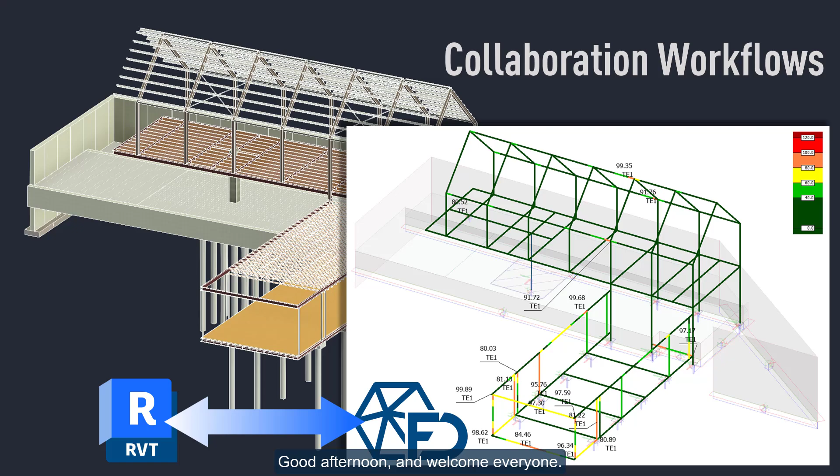In today's webinar, I will guide you through the main connection possibilities between Revit and FEM-Design. The focus is on practical workflows, how data moves between Revit and FEM-Design, what we can transfer, and which workflow to use in different situations.

There are two main ways to connect Revit and FEM-Design. One is the IFC workflow, where we exchange the physical model through IFC. The other is the direct add-in workflow. It uses the StruSoft Revit add-in and exchanges data through StruXML, our own data exchange format.

Both workflows can go in either direction, from Revit to FEM-Design and back again. But they are not used for the same purpose. The key question is, which connection should be used and when? Let's start with a short overview.

IFC is an internationally developed and ISO standardized open data format. It is the most widely used BIM exchange format, and it is supported by hundreds of applications worldwide. Several IFC versions are available, and both Revit and FEM-Design support them. But for Revit-based workflows, IFC 2x3 coordination view is still often the safest and most predictable starting point. That is why I usually recommend starting with IFC 2x3.

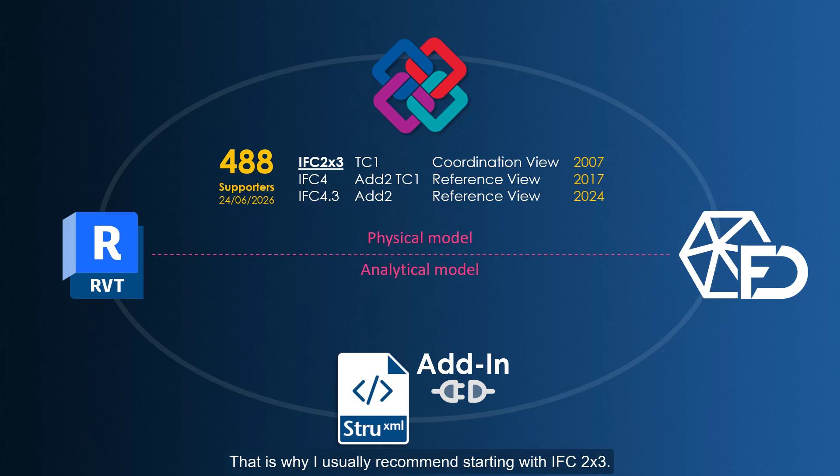The second workflow is the add-in-based connection. It's existed for many years, but after Revit 2023, it had to be redesigned because Autodesk changed the analytical model concept in Revit. Today, I will focus on the current second-generation add-in workflow.

Its latest release can be downloaded free of charge from the FEM-Design wiki. It supports Revit 2026 and 27, and it was published yesterday, so it is very fresh, almost hot. After installation, it appears directly inside the Revit user interface.

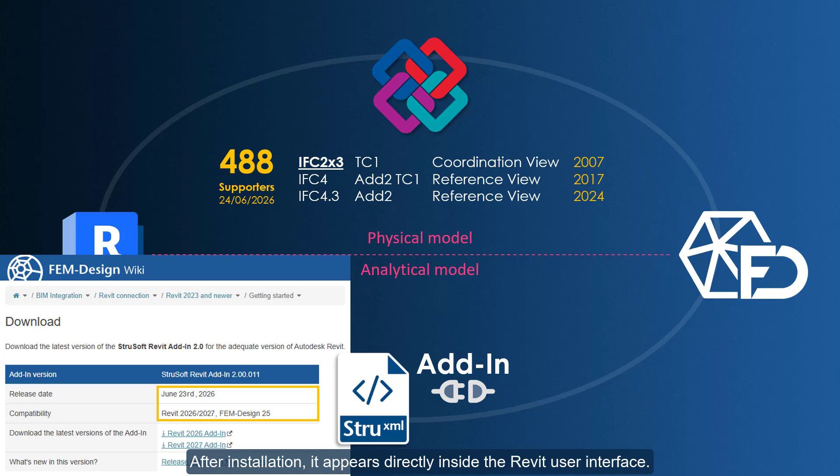So what is the main task? In structural design, we need an analytical model suitable for calculation. In the IFC workflow, the physical model comes from Revit into FEM-Design. During import, FEM-Design creates the analytical model from the physical geometry. The engineer then checks, corrects, and completes it.

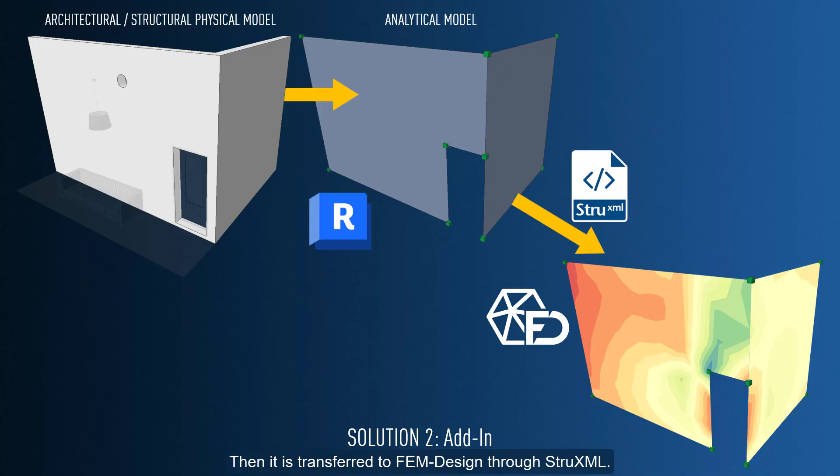In the add-in workflow, the analytical model is already created in Revit. It can include analytical members, panels, basic supports, and simple loads. Then it is transferred to FEM-Design through StruXML. So in simple terms, IFC starts mainly from a physical model. The add-in starts mainly from an analytical model.

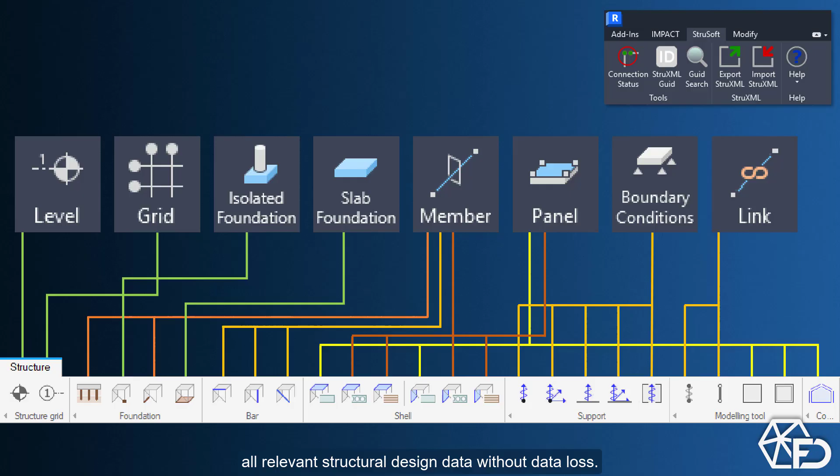Let's now look first at the direct Revit connection using the add-in. We start with a physical model in Revit. This can be an architecture model or a structural model. From this physical model, we can generate an analytical model directly inside the Revit project. After that, the StruSoft add-in can export this analytical model to FEM-Design. The goal of the add-in workflow is to transfer all relevant structural design data without data loss.

It is important to understand that in Revit, not every physical structural object has a native analytical counterpart. Isolated and slab foundations are good examples. They don't have an analytical representation in Revit, while FEM-Design has object types for them. Since these are still important structural objects, the add-in can transfer them to FEM-Design as part of the exchange workflow.

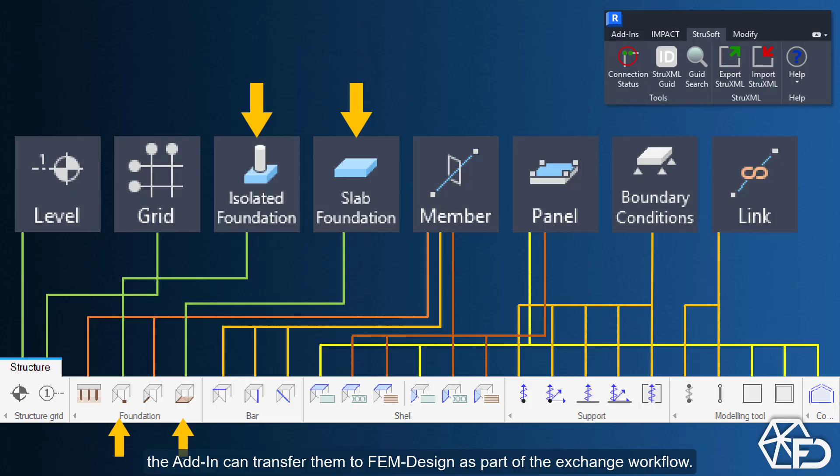The same is true for levels and grids. They are not analytical elements, but they are useful reference objects for positioning, orientation, view definition, and identification. Therefore, the add-in transfers them as well.

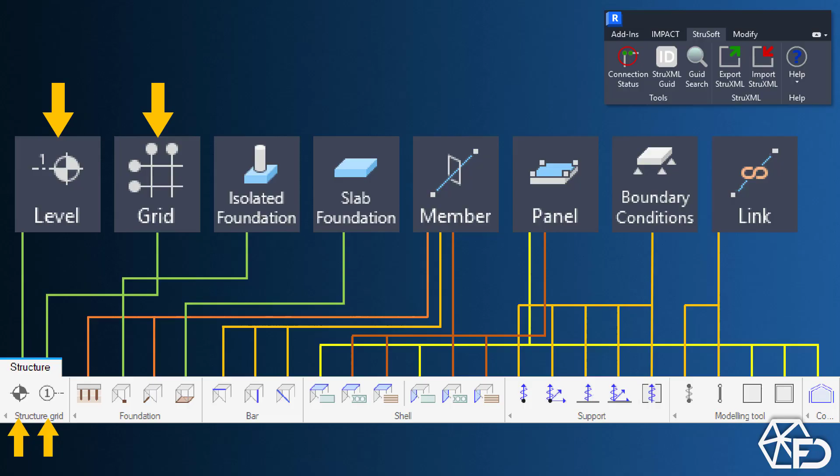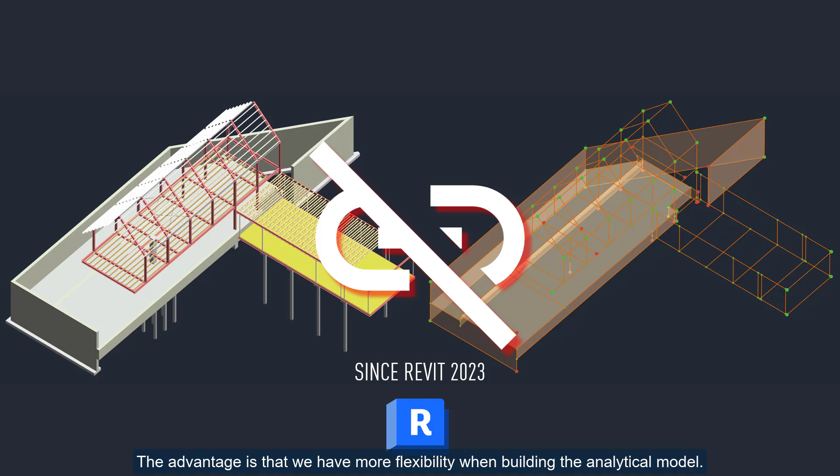In the current Revit concept, analytical objects are independent from physical objects. They are not automatically linked to them, and they don't follow every change in the physical model. The advantage is that we have more flexibility when building the analytical model. In fact, analytical objects can even exist without physical counterparts. This was an important change in Revit 2023. Before that, analytical counterparts were always directly linked to the physical structural objects.

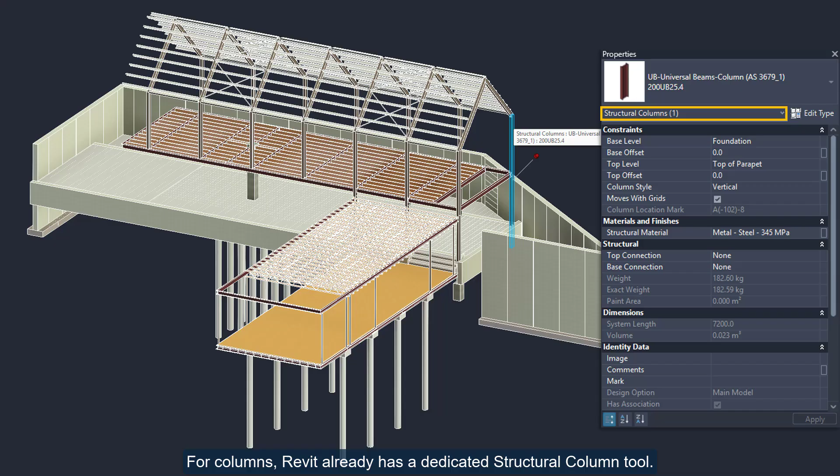So, if we want to create analytical objects from physical load-bearing elements, we first have to prepare the Revit model properly. For walls, the structural parameter has to be activated. The same applies to floors. For columns, Revit already has a dedicated structural column tool, so you don't need to set anything else. For beams and bars, the structural framing tool is used.

Structural foundations are a special case. They don't have native Revit analytical counterparts, but if we want, they can still be exported to FEM-Design by the add-in. After this preparation, we can use Revit's analytical automation tools to generate the analytical model. This can be fully automatic, but it can also be controlled by settings.

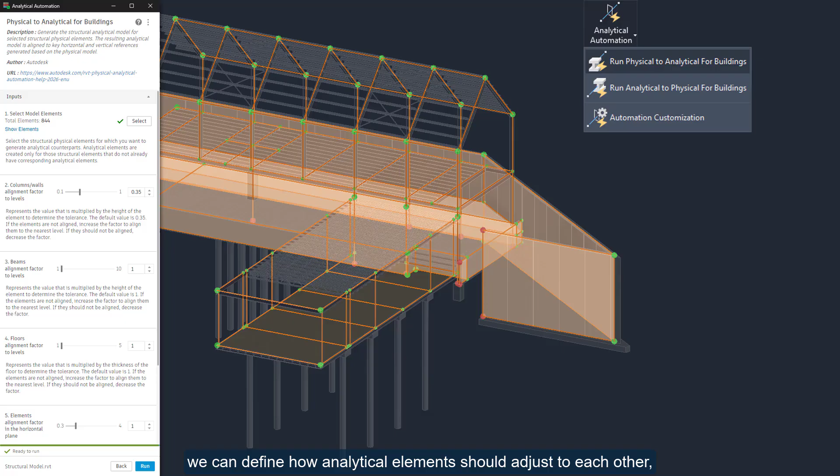With automation customization, we can define how analytical elements should adjust to each other, in what order, with what priority, and within what tolerance. Revit also allows manual analytical modeling. We can create analytical members and panels directly from the Analyze tab. When analytical elements are generated from physical objects, they usually inherit material and section information. But manually created analytical elements may not have all required data.

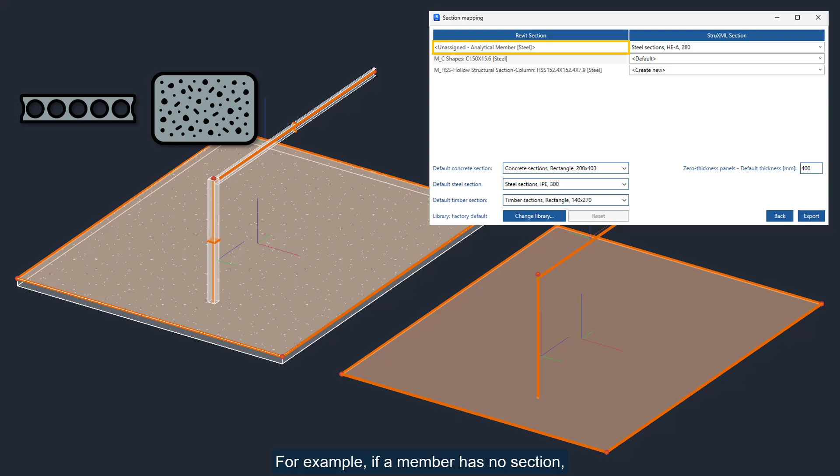This is not a problem because during export, we can assign missing materials, sections, or panel thicknesses. For example, if a member has no section, we can define a default starting section by material type. If a panel has zero thickness, we can define a substitute thickness for FEM-Design.

Inside Revit, we can also define boundary conditions and analytical links. Boundary conditions correspond to supports in FEM-Design. Links correspond to FEM-Design's point-to-point connections. Revit can also define simple loads, point loads, line loads, and area loads, organized into load cases.

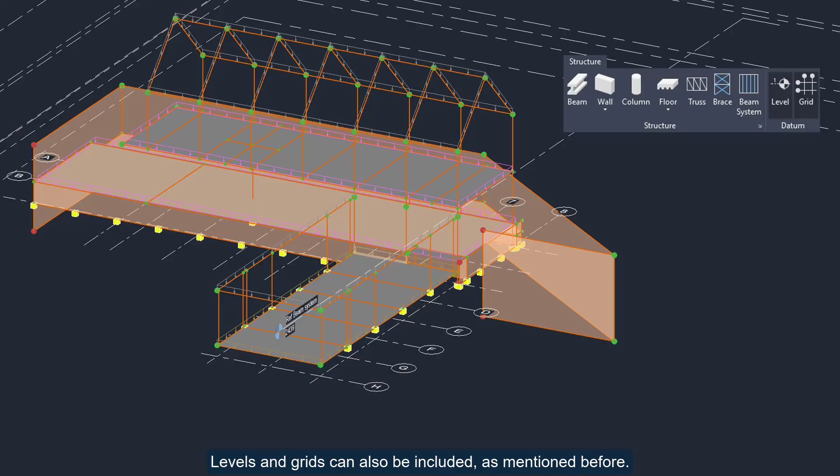Levels and grids can also be included, as mentioned before. Levels may represent building stories, but they can also be general horizontal reference planes. Grids are useful for orientation and later model checking.

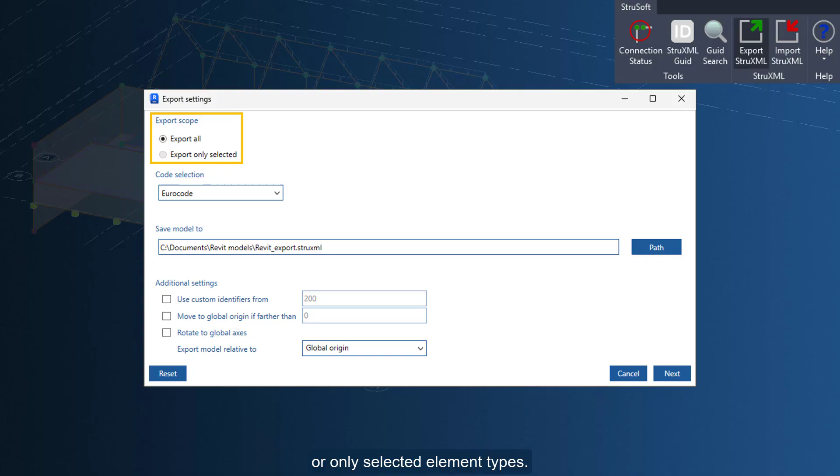To export the model, we start the StruSoft add-in command, Export StruXML. The export is guided by a sequence of dialogues. First, we define which objects should be exported. We can export all relevant objects in the project or only a current selection. This is useful if we want to export only one story, one part of the model, or only selected element types. Later, several StruXML files can be imported or merged into one FEM-Design project.

We then select the design code. This is important because the material and section databases used in the next steps depend on the selected standard. Then we arrive at position settings. In many BIM projects, especially large public or infrastructure-related projects, the model is placed in real-world coordinates. This is important for coordination and model federation.

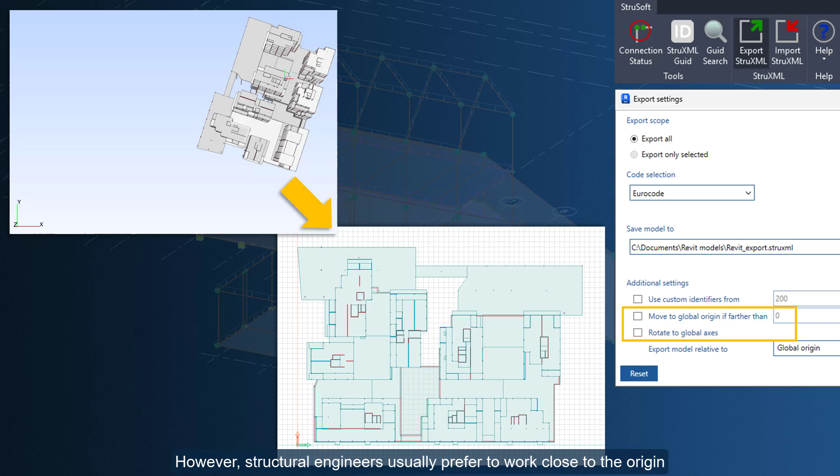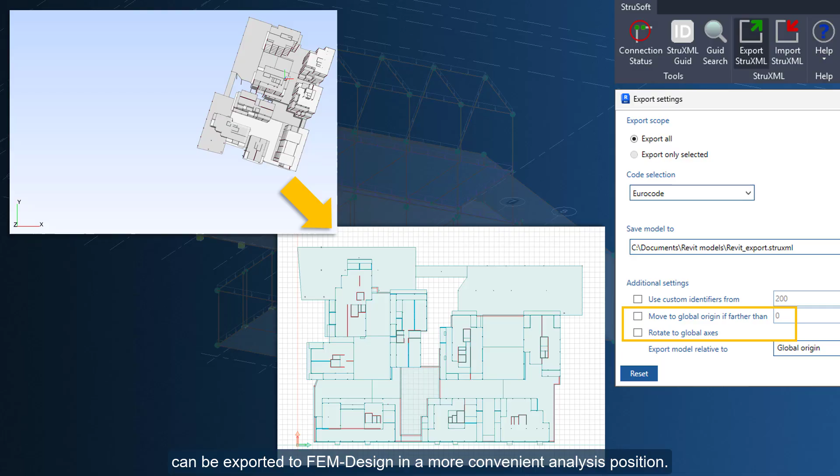However, structural engineers usually prefer to work close to the origin and aligned with the global axis of the analysis software. Therefore, the add-in can move and rotate the model automatically during export. This means that the model located far from the Revit origin can be exported to FEM-Design in a more convenient analysis position. This is also important for bidirectional communication.

If the model later comes back from FEM-Design to Revit, it has to return to its original Revit position. The add-in can handle this automatically because the transformation values are stored in the Revit project itself. Revit also has different reference systems: global origin, project base point, and survey point. During export, we can choose which reference system should be used.

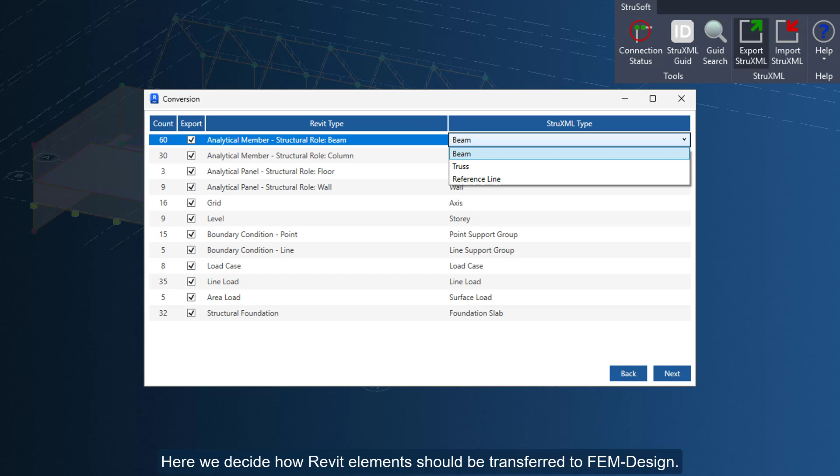The next step is type mapping. Here we decide how Revit elements should be transferred to FEM-Design. For example, an analytical member with a beam role can become a FEM-Design beam, a truss, or only a 3D reference line. In the list, we can see analytical members and panels, but also grids, levels, boundary conditions, structural foundations, and loads.

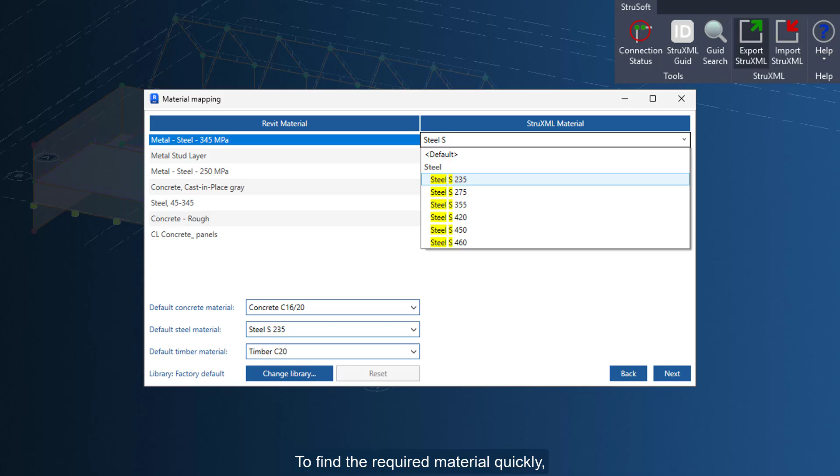After type mapping, we map Revit materials to FEM-Design materials. We can use automatic default mapping based on material types, or we can manually select the exact FEM-Design material from the database. To find the required material quickly, we can simply type part of its name in the search field.

Then we map the cross-sections of analytical members. A useful feature is that the add-in can create new FEM-Design sections from Revit data. With the Create New option, the section geometry is saved into the StruXML file. During import, FEM-Design assigns the new section to the corresponding analytical members. Material and section mapping can also be based on custom StruXML libraries, not only on the standard built-in FEM-Design databases.

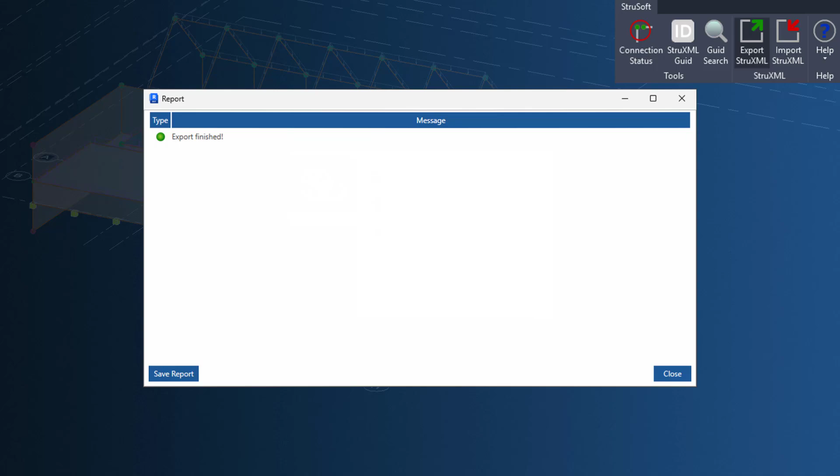At the end of the export, we receive a report. This summarizes the result and lists possible warnings, for example, missing material or section mappings. Now we can open the exported StruXML file in FEM-Design. Usually, we open it in the 3D Structure module, but it can also be opened in the Plate module, for example, if we transfer only one floor system with its supporting elements.

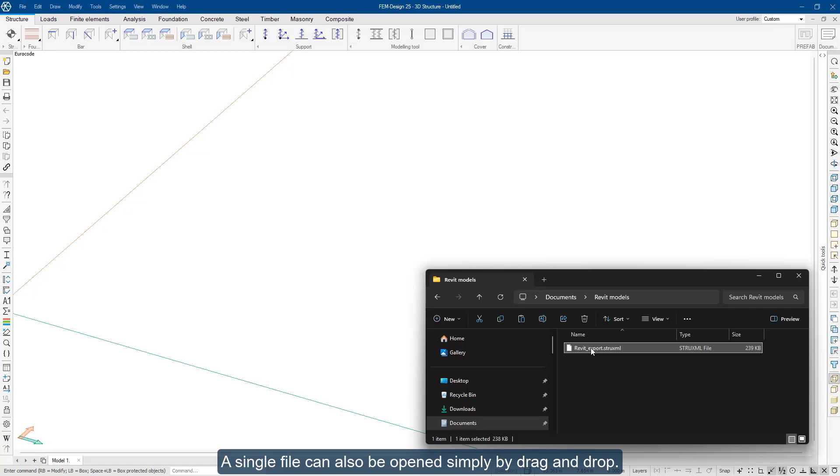The file can be opened with the Open command or inserted with the Paste command. Paste is useful when we build up one FEM-Design project from several StruXML files. A single file can also be opened simply by drag and drop. The import itself is very fast. After import, the design code follows the standard selected in the add-in export settings.

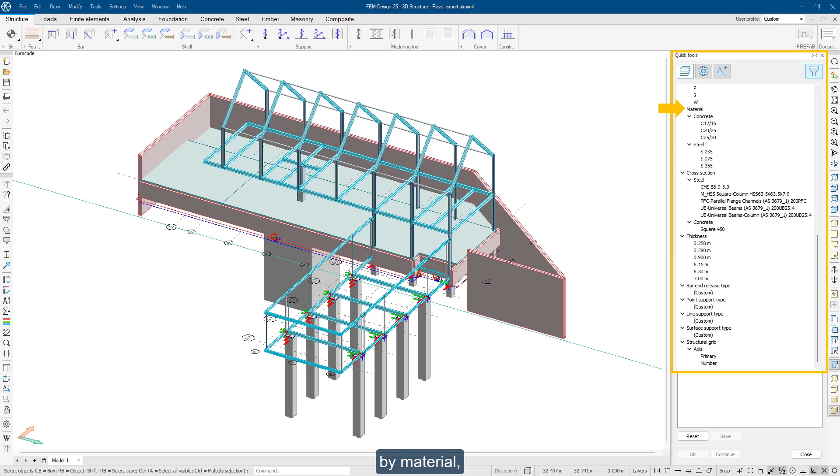We can now see the analytical members and panels together with levels and grids. If we switch on the physical representation, we can also see the assigned thicknesses and cross-sections. The filter panel in FEM-Design helps us navigate the imported model. Elements can be grouped by story, by axis, by type, by support type, by original Revit identifier or name, by material, or by section, including the new sections generated from Revit section data, like this selected example.

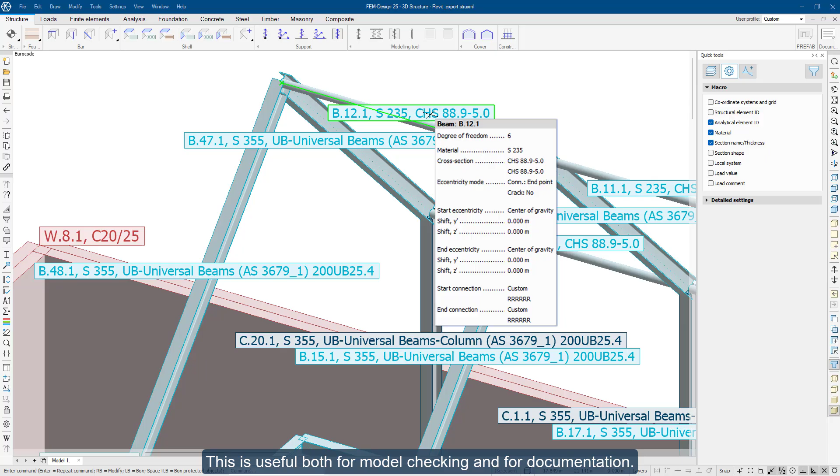Element information can also be displayed as labels in the model space, or checked by hovering over the elements. This is useful both for model checking and for documentation. Supports are imported according to the boundary conditions defined in Revit. Loads are also imported together with the load cases. However, additional loads, design load groups, and combinations have to be completed inside FEM-Design.

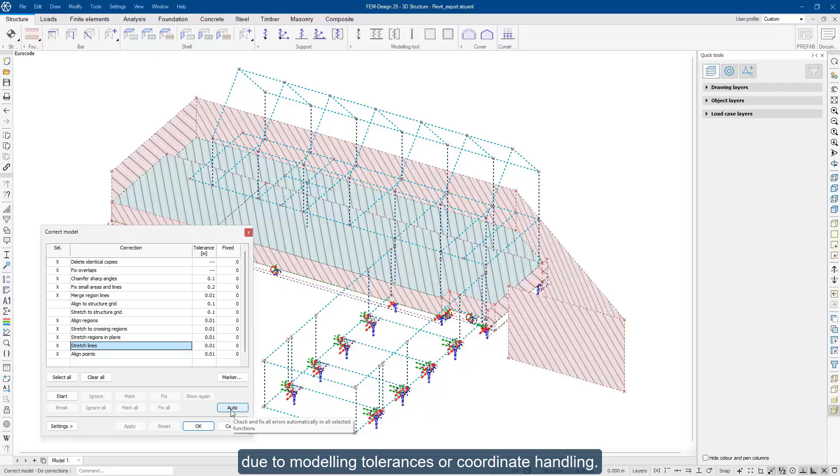After import, even if the model looks correct, we should always check it. First, we should look for small geometry problems and connection issues. These can appear even in well-prepared Revit models due to the modeling tolerances or coordinate handling.

FEM-Design provides the correct model function to find and fix them. It can find short elements, inaccurate line elements, small regions, or other problematic objects, and it can correct them under user control. After correction, it is useful to run the check again. The goal is that the number of problematic objects should go down and finally converge close to zero.

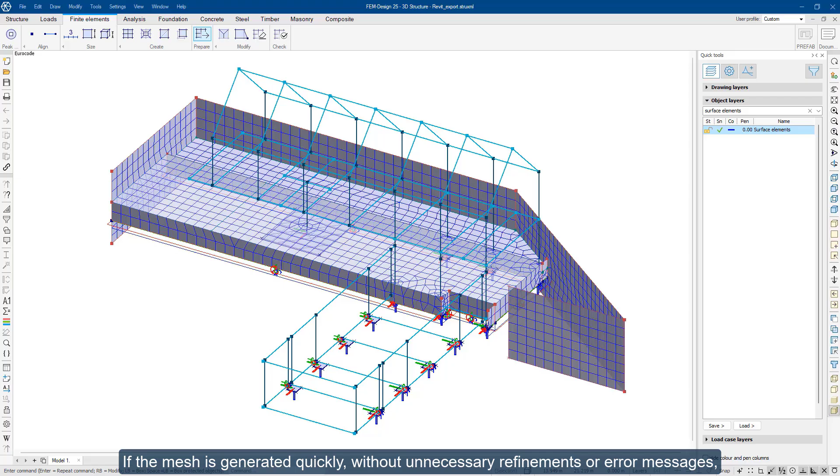Another useful check is finite element mesh generation. If the mesh is generated quickly, without unnecessary refinements or error messages, this means that the geometry is correct. We can also run a simple analysis, for example, with automatic self-weight, and check the displacement shape. This is a very practical quality check. If elements are not connected properly, or if supports are missing, the problem usually becomes visible very quickly.

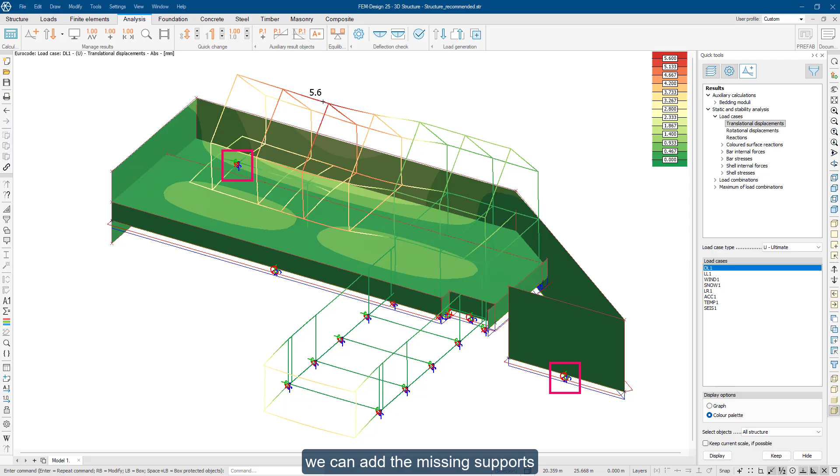In this example, the displacement animation shows that some walls were not supported in Revit, and the left side of the frame is weakly supported. Inside FEM-Design, with the modeling tools, we can add the missing supports or propose a more stable bracing or support system. After that, we can continue with the normal analysis and design workflow. For example, we can design steel members and optimize their cross-sections based on their utilization. After the model has been checked and designed, it can also be sent back to Revit.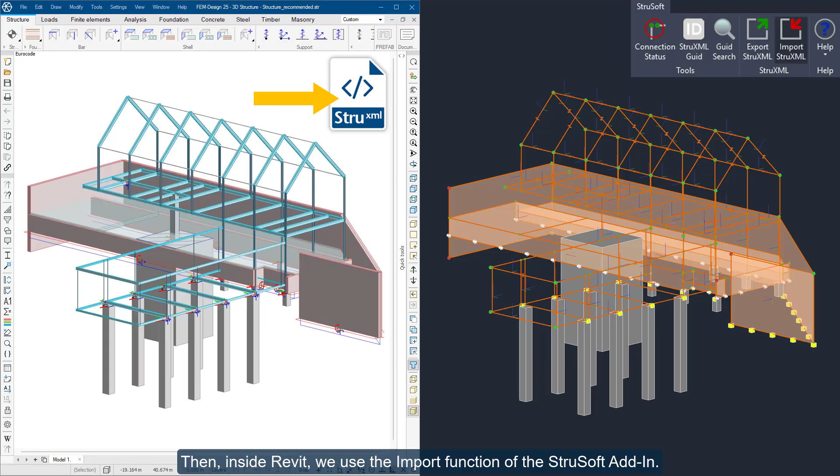Now let's look at the add-in workflow in the other direction, from FEM-Design to Revit. First, we export the FEM-Design model to StruXML. Then, inside Revit, we use the import function of the StruSoft add-in. Again, the purpose is to transfer all relevant information without data loss. The first step is file selection. Here we can also decide whether to import the original FEM-Design data as reference information together with the unique element identifiers. Then we define type mapping and filtering.

We can decide which elements should be imported and which should be skipped. For example, if stories and axes already exist in the host Revit project, we can leave them out. Some FEM-Design objects become physical Revit objects. For example, a slab foundation can become a Revit slab foundation, because Revit doesn't have a corresponding analytical object for it, as mentioned before. Then we do the material and section mapping.

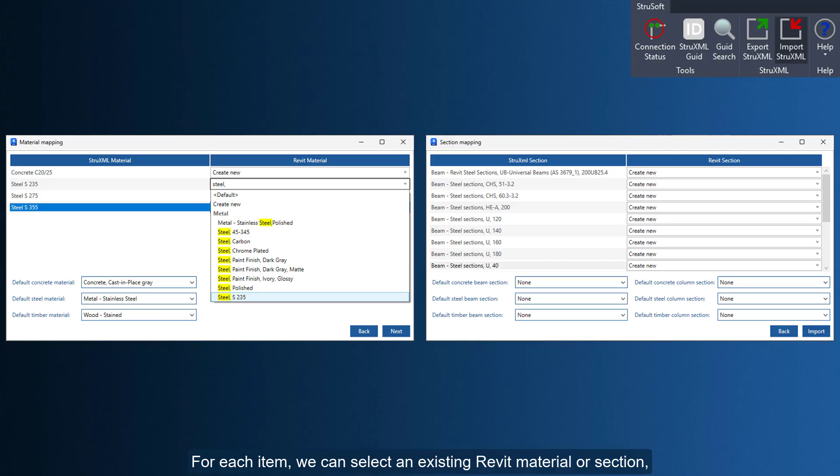For each item, we can select an existing Revit material or section, or choose Create New. This is one of the strongest features of this workflow. The add-in can create new Revit materials and section types from the FEM-Design data stored in the StruXML file. So the final design materials and sections can be used directly inside Revit. There is no need to recreate them manually in the family editor, either before or after import.

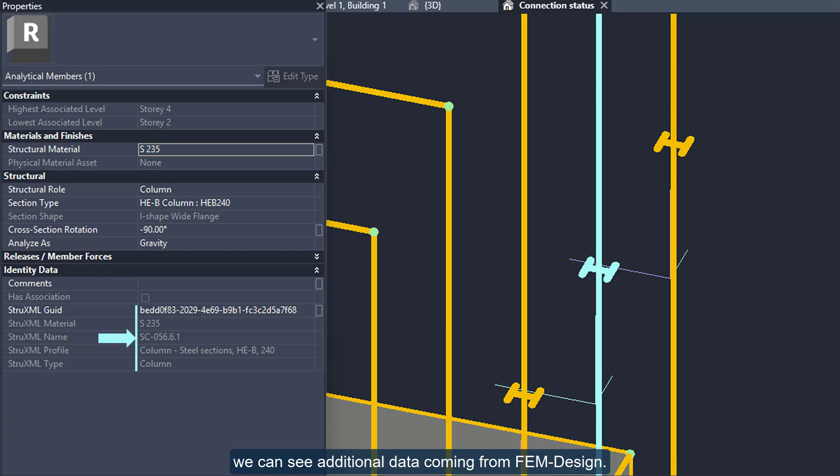At the end, we again receive an import report. Just for demonstration, I show a simple warning here. One column has no section mapping. The element is still imported without a section assignment. If we select an imported element in Revit, we can see additional data coming from FEM-Design. This may include the global unique ID, name, material, profile, and object type.

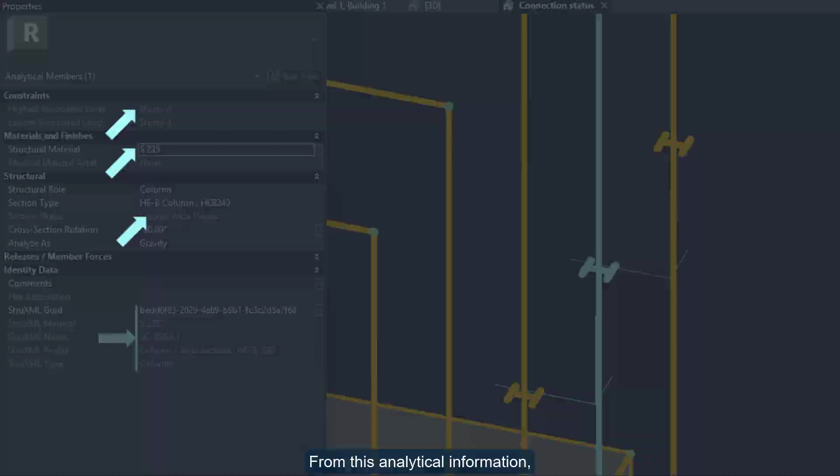At the same time, the analytical member receives the corresponding structural material, role, and section type. From this analytical information, we can create the final physical Revit element using Revit's automatic converter tool. So after import, it is a very simple step. We select the full imported analytical structure and Revit converts it into the required physical elements.

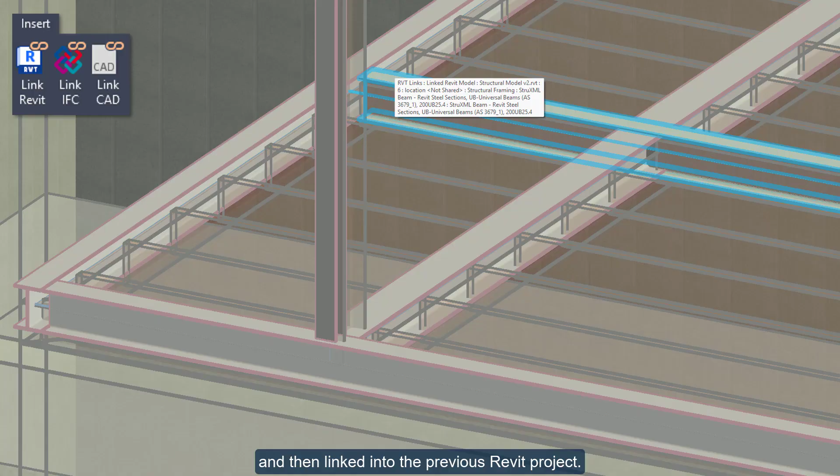Now, a few words about change management. In Revit, there is no dedicated change management tool, but we can use link models for visual comparison. For example, a new StruXML version can be imported into a separate Revit file and then linked into the previous Revit project. With different colors, we can compare the old and new status visually. In Revit, the same reference model idea can also be used with IFC and CAD files.

On the FEM-Design side, we can compare different StruXML files directly with the Compare Files tool. This tool shows new, deleted, and modified elements with color visualization and detailed lists of changes in geometry and properties.

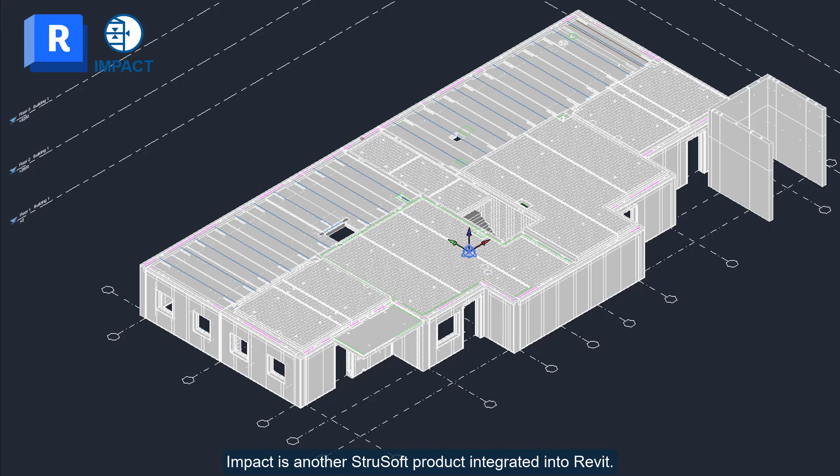Now I would like to show a few additional workflow highlights related to the add-in connection. The first one is Impact Precast. Impact is another StruSoft product integrated into Revit. It supports modeling, detailing, shop drawings, and manufacturing workflows for precast projects. Because Impact works inside Revit, it creates native Revit objects. This means that the analytical counterparts of Impact precast elements can be transferred to FEM-Design through the add-in.

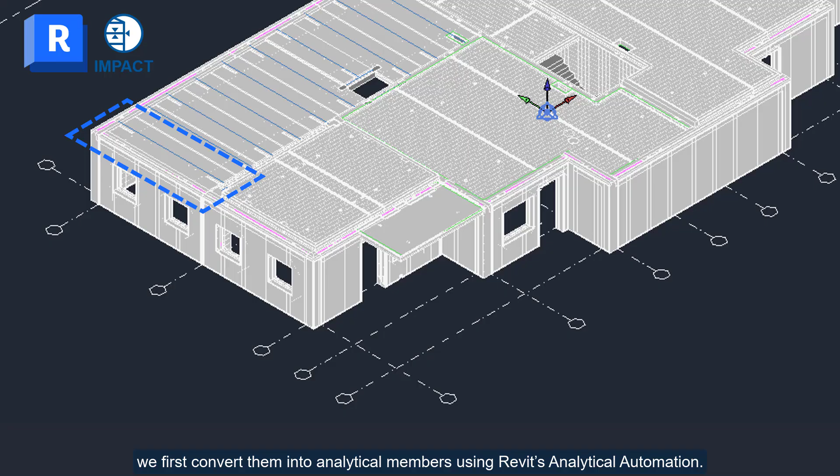There are a few details to keep in mind. Impact creates precast panels in Revit as profile beam or column objects. To transfer them to FEM-Design, we first convert them into analytical members using Revit's analytical automation.

Since the conversion uses the original panel geometry, the part's visibility should be set to show original. Inside FEM-Design, these transferred elements may arrive as profile beams and columns. If we want to analyze them as precast panels, shell objects, we can convert them quickly with the convert function. So thanks to the add-in, we also solved the connection between IMPACT and FEM-Design.

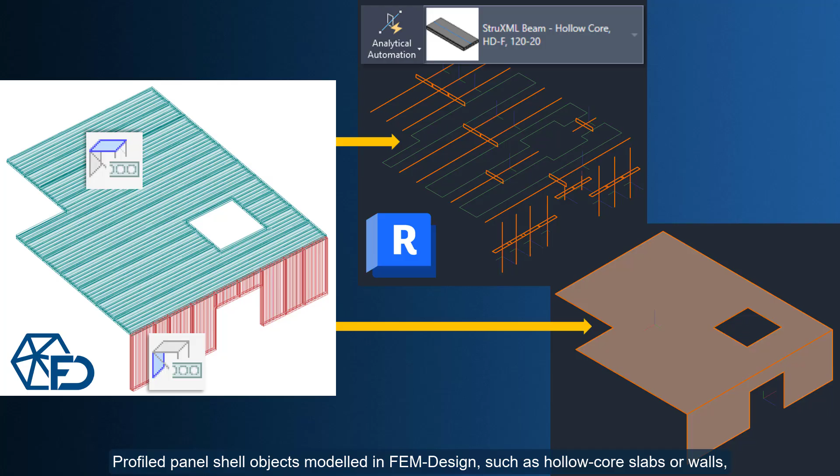The reverse workflow is also supported. Profiled panel shell objects modeled in FEM-Design, such as hollow core slabs or walls, can be imported into Revit as profiled analytical members, reference contour lines, or just simplified physical panel objects.

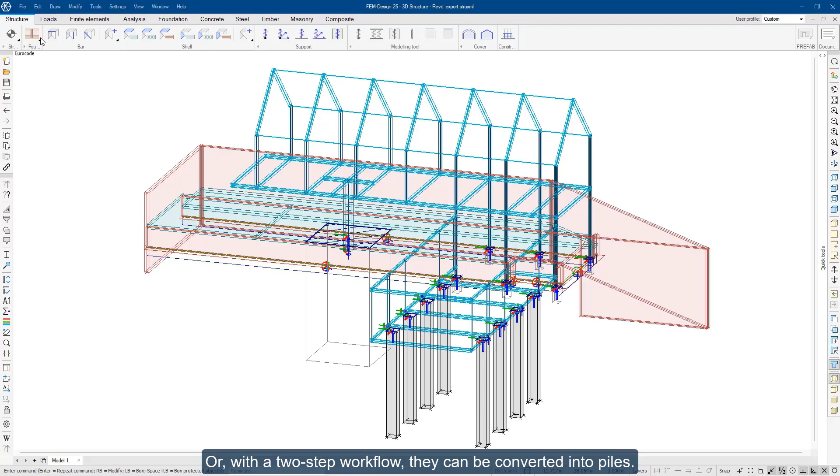Another special case is foundations and piles. If foundation objects arrive in FEM-Design, we can decide whether we want to use them as structural objects or only as references. They can also be converted into drawing solid reference objects, or with a two-step workflow, they can be converted into piles. First, we define a soil object. Then, we use the convert function to create piles with spring data generated automatically from the soil connection.

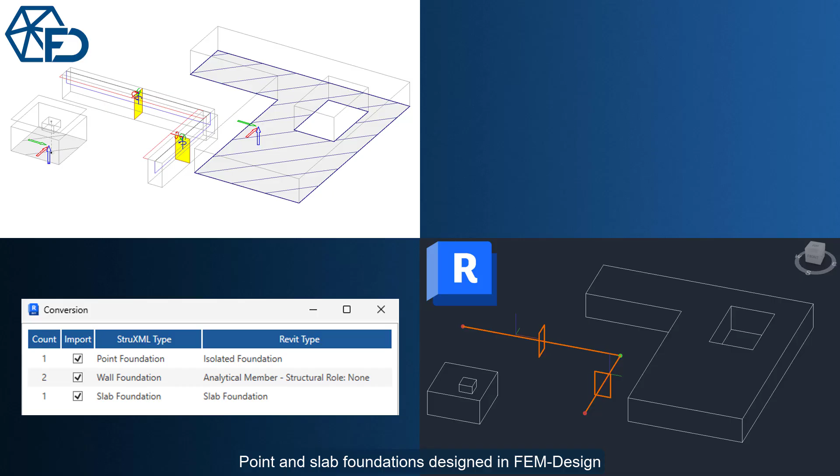These piles can also be sent back to Revit. Since Revit doesn't have a dedicated pile object, they can be represented as profiled analytical members or as reference model lines. Point and slab foundations designed in FEM-Design can also be transferred as physical Revit foundation objects. Wall foundations can be represented as profiled analytical members and later converted into beams.

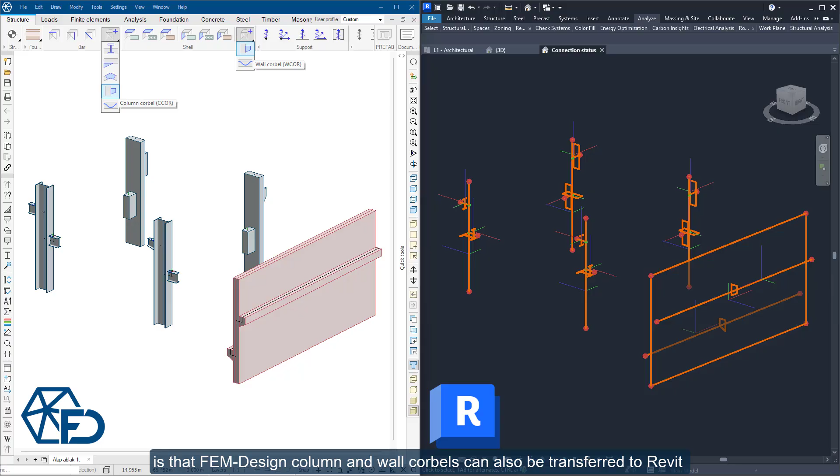Another recent improvement and new feature is that FEM-Design column and wall corbels can also be transferred to Revit as profiled analytical members and panels. Inside Revit, the automatic converter can then create the corresponding physical objects from these analytical elements.

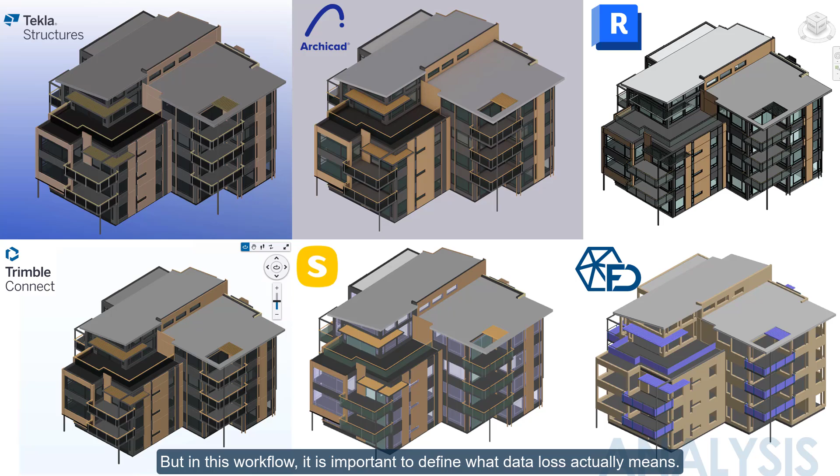Now, let's move to the IFC-based connection and start with the Revit to FEM-Design direction. Here, the goal is to extract all information needed for structural design from a physical architectural or structural model and use it to create a calculation-ready analytical model in FEM-Design. Again, we want to avoid data loss. But in this workflow, it is important to define what data loss actually means.

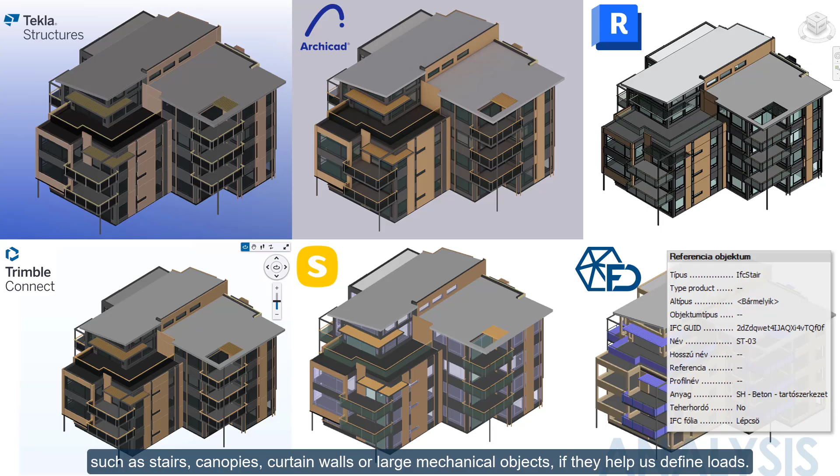For BIM coordination tools, data loss often means that every object should arrive exactly as it was modeled. For analysis software, the goal is different. We need the load-bearing structural elements, their relevant properties, and the reference objects that are useful for design. For example, we don't need the detailed geometry of windows and doors, but we need the openings in the load-bearing walls and slabs. We may also need non-structural reference objects, such as stairs, canopies, curtain walls, or large mechanical objects, if they help us define loads.

With IFC, the main task is to convert the physical model into an analytical model inside FEM-Design. This workflow has two main parts. First, during import, we filter object types, remove unnecessary objects, map data, and convert physical objects into analytical elements. Second, after import, we adjust, connect, support, and check the analytical model to ensure continuous load transfer.

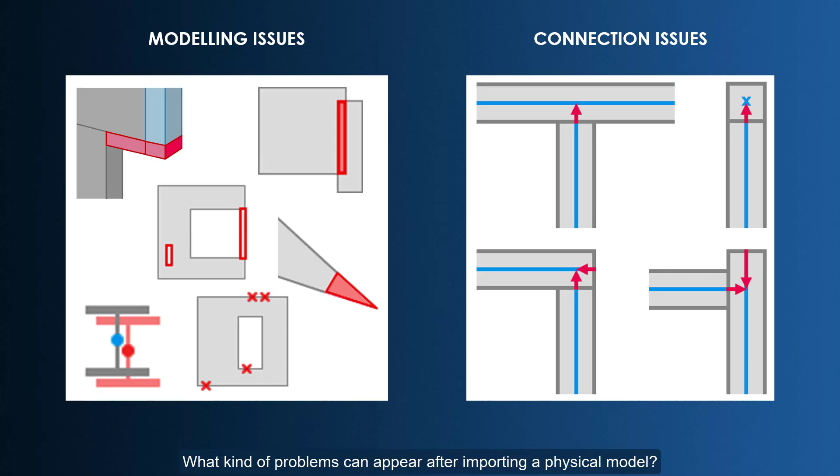What kind of problems can appear after importing a physical model? There can be small modeling issues, very short elements, duplicated objects, overlapping geometry, small openings, unnecessary points, or very sharp angles. All of these can affect the quality or success of finite element mesh generation. There can also be connection issues. Physical objects may touch each other correctly in architectural models, but the analytical lines and surfaces generated from their central lines and mid-surfaces will not automatically connect. This is why model correction and adjustment are essential in the IFC workflow.

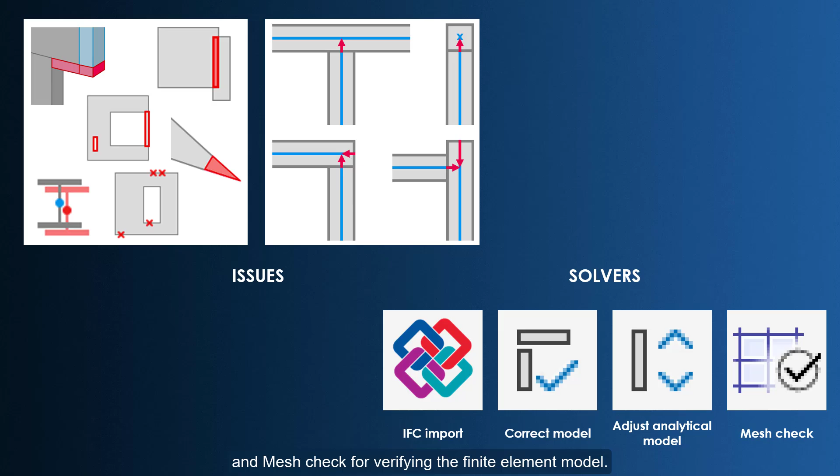FEM-Design provides several tools for this. Filtering during import, correct model for geometry problems, adjust analytical model for element connections, and mesh check for verifying the finite element model. Before exporting from Revit, the sender should check a few things.

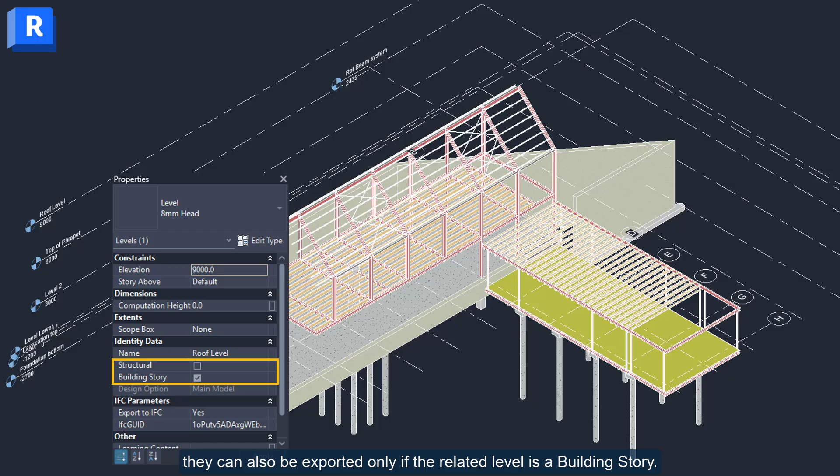The model may contain levels, grids, and rooms. As mentioned earlier, levels and grids are useful for positioning and coordination. Rooms can be useful as references for live load definition. There is an important Revit-specific rule. In Revit, only levels marked as building story are exported to IFC. Since grids and rooms are assigned to levels, they can also be exported only if the related level is a building story.

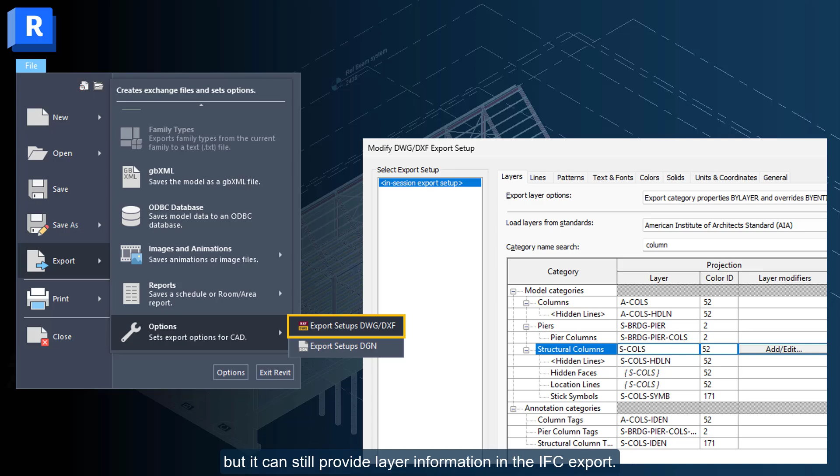Layer filtering is also important in IFC workflows. Revit doesn't use native layers inside the project, but it can still provide layer information in the IFC export. For this, Revit uses the layer settings defined for DWG or DXF export. So, if we want to control the IFC layer names, we have to modify them there.

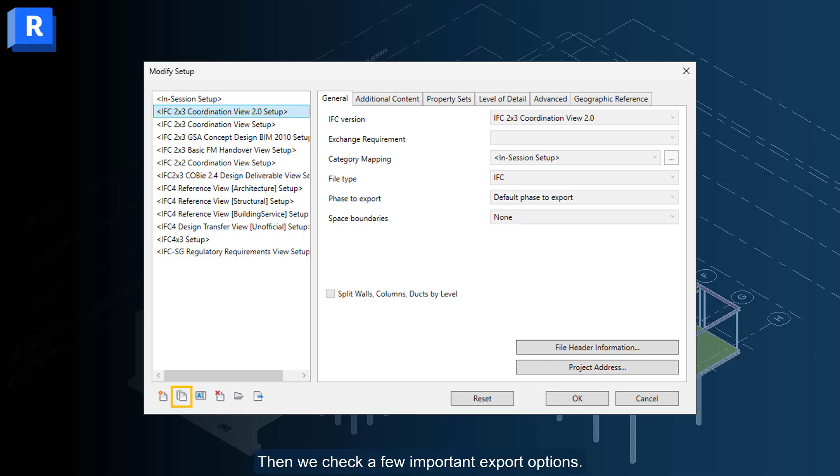After the model is prepared, we set up the IFC export. For this workflow, as mentioned earlier, I recommend starting with the well-established IFC 2x3 Coordination View 2.0 setup. To customize its settings, we first duplicate the setup and save it under a new name. Then we check a few important export options. Revit categories should be mapped to the right IFC classes. For example, structural columns should be exported as IfcColumn.

IFC also uses predefined types. These provide more detailed classification. For example, slabs can be classified as floors, roofs, stair landings, or base slabs.

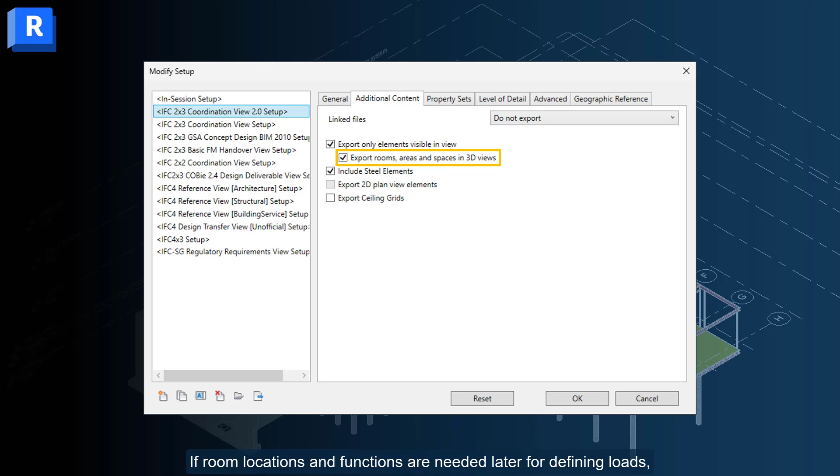If the Revit project contains linked models, we can include them in the export if they contain elements needed for analysis. We can also decide whether to export only the visible elements of the current view or the whole project. If room locations and functions are needed later for defining loads, room export has to be activated.

The default property set settings are usually enough for analysis workflow. For advanced settings, I recommend leaving all objects unselected. We don't need any further data for analysis. Finally, we can choose the coordinate base of the element coordinates, such as the internal origin or the survey point, similarly to the add-in workflow.

After exporting the IFC file, we open it in FEM-Design. The following import steps are not Revit specific. They can also be used for IFC files from other modeling software, like Tekla, Archicad, or Allplan. First, we can filter the model by project hierarchy. If the IFC file contains several buildings or stories, we can import only the parts we need. FEM-Design can handle more than one building inside the project.

Then we define positioning. To avoid issues with models located far from the origin, FEM-Design can move the model close to the origin and rotate it to the global axis. The transformation is stored, so the original position and orientation can be restored later during export.

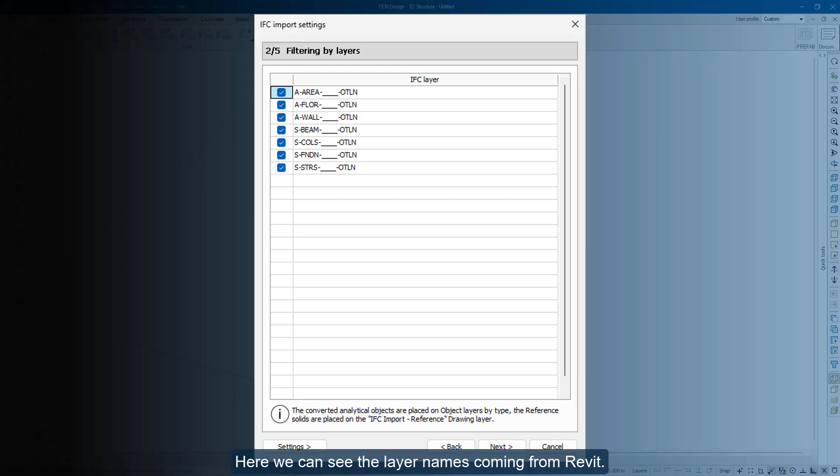The next step is layer filtering. Here we can see the layer names coming from Revit. For example, the S-COLS layer hosts the structural columns. Only elements on the selected layers will be imported.

After that, we perform type filtering and mapping. Here we define how IFC object classes should be generated in FEM-Design. For example, IFC member objects can become editable analytical elements, such as beams or trusses, or reference objects, such as drawing solids or surface regions.

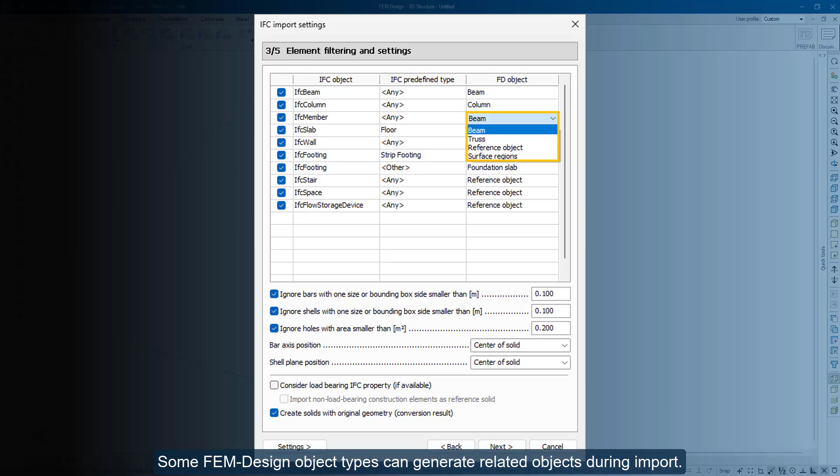Some FEM-Design object types can generate related objects during import. For example, an IFC footing imported as a foundation slab can automatically receive the corresponding surface support type. Some objects can be imported only as reference objects, such as stairs, spaces representing Revit rooms, or mechanical equipment that may represent significant loads.

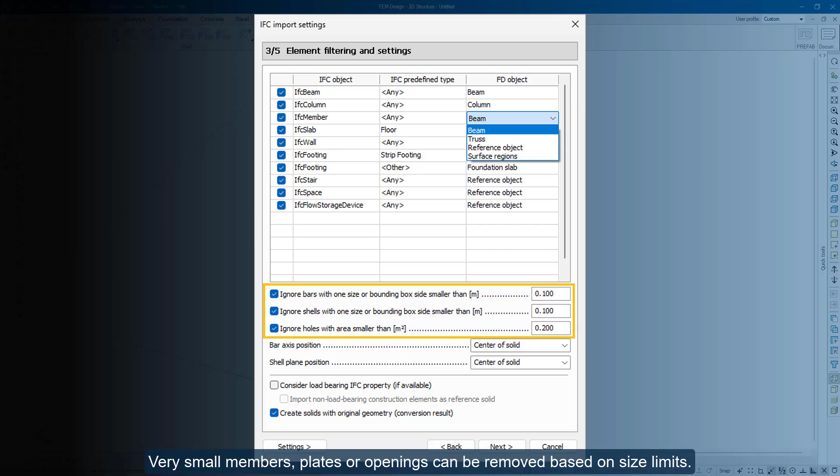Next, we can apply geometry filtering. Very small members, plates, or openings can be removed based on size limits. We can also import the original physical geometry as reference solids. This helps us compare the original model with the generated analytical model.

Then we perform material and cross-section mapping. As in the add-in workflow, FEM-Design can also generate new cross-sections if they don't exist in the database. This means that a Revit section with its specific geometry, like this hollow steel column section, can be created and stored in the FEM-Design section library.

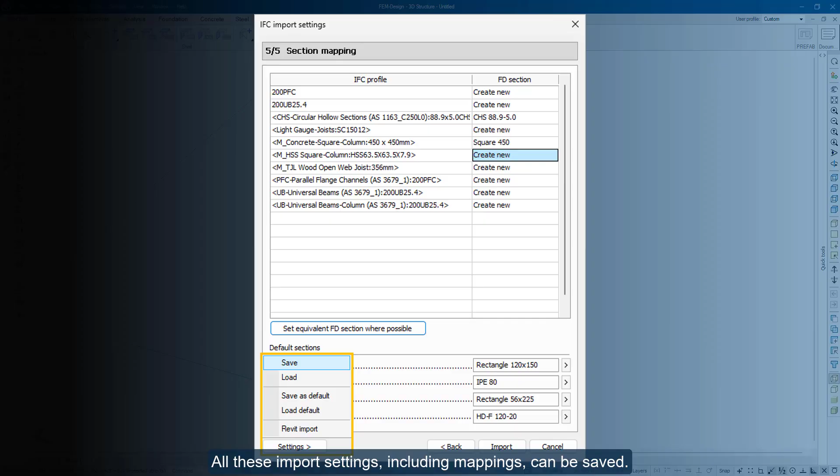All these import settings, including mappings, can be saved. This is very useful in repeated project workflows. If new materials or sections appear later, only those new items need to be mapped. After import, FEM-Design shows a report. It may include warnings, for example, about geometry simplification.

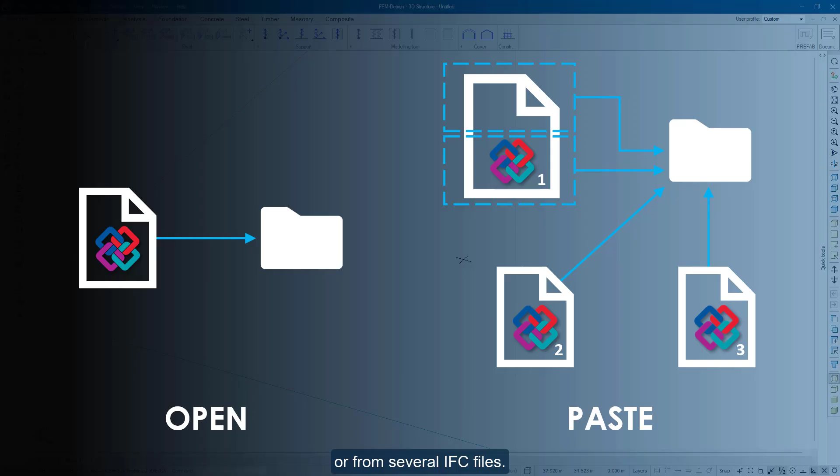Similarly to StruXML workflow, we can import IFC files with open or paste. Open is useful for processing the full file in one step. Paste gives more control when we import by story, by layer, by element type, or from several IFC files. After import, the selected objects appear in FEM-Design.

The result is color-coded. Green means that an object was created with its original geometry. Orange means that geometry modifications were applied during import. For example, the corner of these two walls was simplified during import to create a correct connection between the analytical wall panels. Blue means that we imported an object as a reference object on purpose.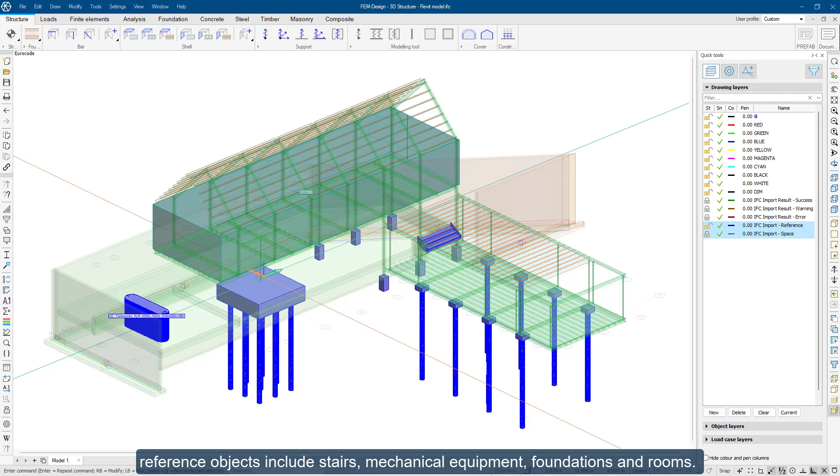In this example, reference objects include stairs, mechanical equipment, foundations, and rooms. These help us define loads or understand the model context. For example, room labels, here you see office, can help us choose the right live load. The structural elements are imported as analytical elements according to their type. For example, columns can be imported with mapped steel material and section.

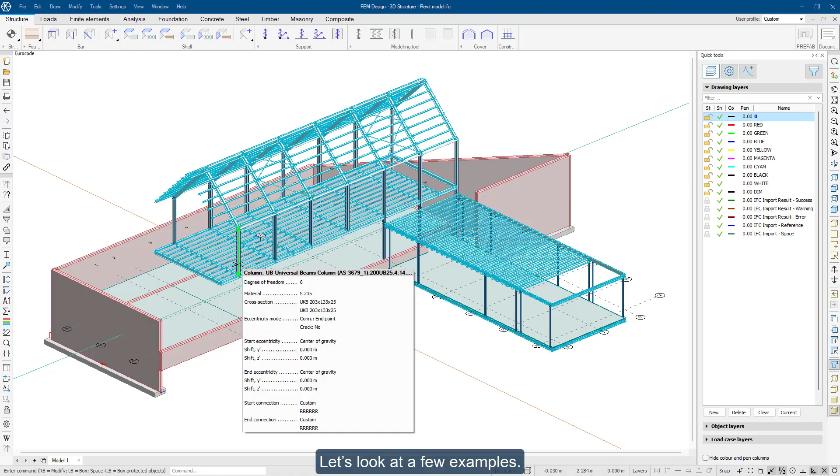After IFC import, the key engineering task is to connect the generated analytical elements. Let's look at a few examples. For walls and slabs, the initial state is usually not fully connected because the analytical surfaces are generated from the physical mid-surfaces. FEM-Design provides dedicated tools in Adjust Analytical Model.

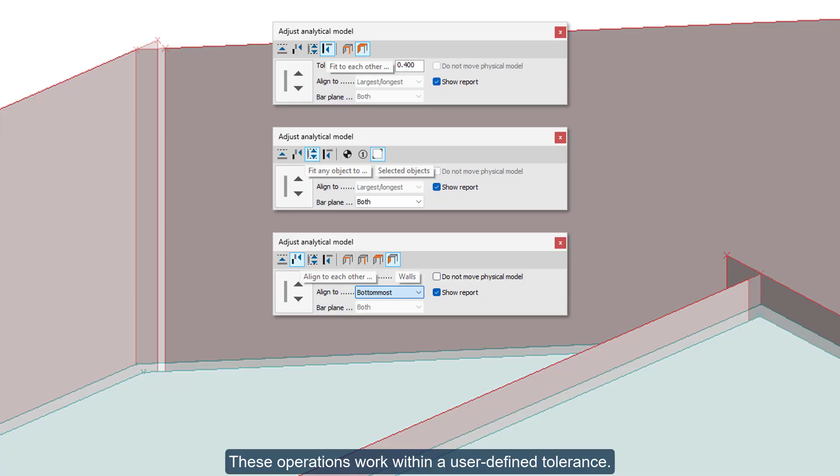Shells can be adjusted to each other, extended or trimmed to any selected object, and aligned into common planes. For example, the bottommost option can align walls to the lowest wall plane. These options work within a user-defined tolerance. Bars can be adjusted in a similar way. They can be moved, extended, or trimmed to connect correctly at the intended nodes.

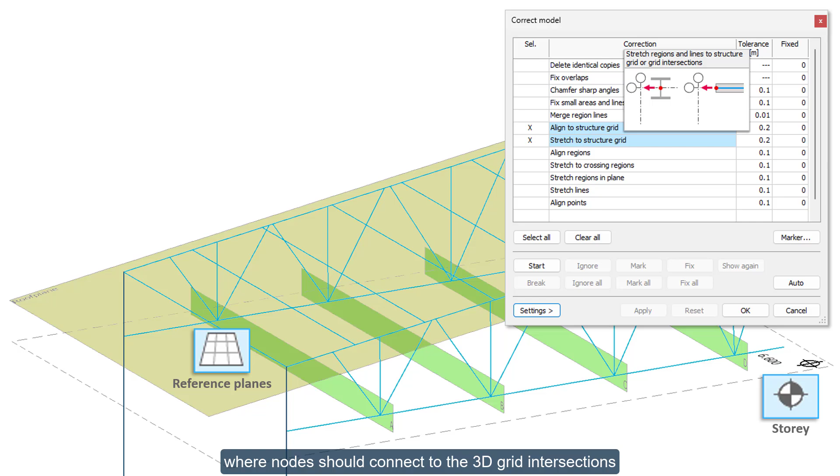In addition, we can use standard modeling commands to modify bars and shells, such as offset, stretch, split, trim, and extend, as well as region operation for shell elements. Stories, grids, and reference planes can also be used as adjustment targets. This is useful for trusses and frame structures, where nodes should connect to the 3D grid intersections automatically detected from the reference system.

Let's look at a simple model corner example, where the correct model function automatically aligns and stretches the objects to the axis system in one quick step. When the model looks ready, we should check it by generating the finite element mesh. If the automatic mesh generation runs without errors, the analytical model is usually usable. If there are connection problems, FEM-Design will find them and show their location.

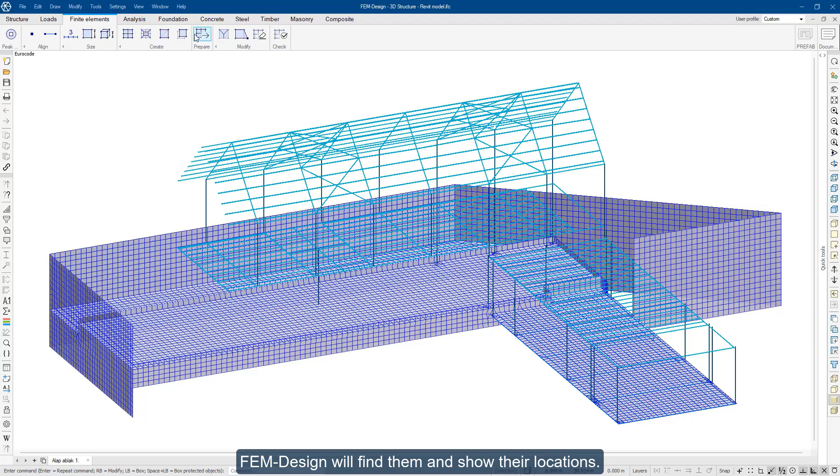In this example, the full mesh generation takes only about 2 seconds. But if we slow it down, we can see 6 steps behind it: overlap checking, surface mesh generation, local refinement, mesh optimization, smoothing, and final geometry and topology checking.

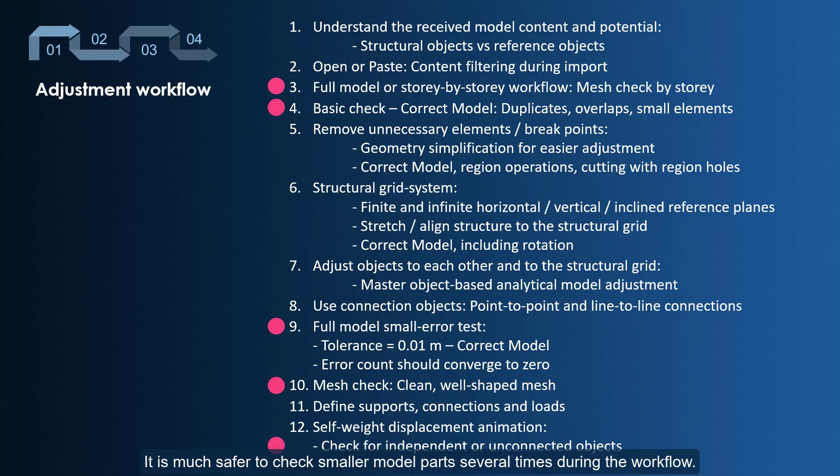The important thing is to use the right correction tools at the right time and in the right order. For different structures, it is useful to have a clear workflow. And don't wait until the end to check the full model. It is much safer to check smaller model parts several times during the workflow.

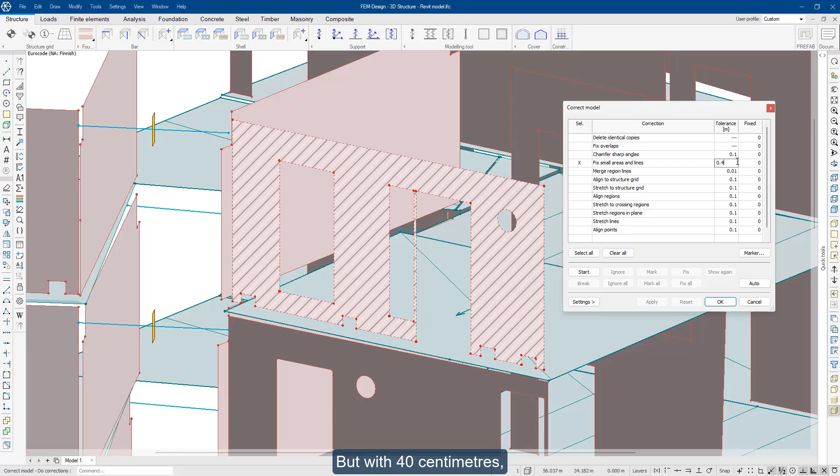Tolerance settings are also very important. For example, with a 30 cm tolerance, FEM-Design may remove only the small unwanted openings and narrow regions. But with 40 cm, larger openings and hanging regions may also be affected. So tolerances should always match the purpose of the correction, and the results should be checked visually.

Now let's briefly look at IFC export from FEM-Design to Revit. FEM-Design's IFC exporter allows us to share all designed structural objects and details with other applications, including Revit. If a FEM-Design project contains several models, we can export only one selected model. We can also define a user coordinate system and export relative to that system.

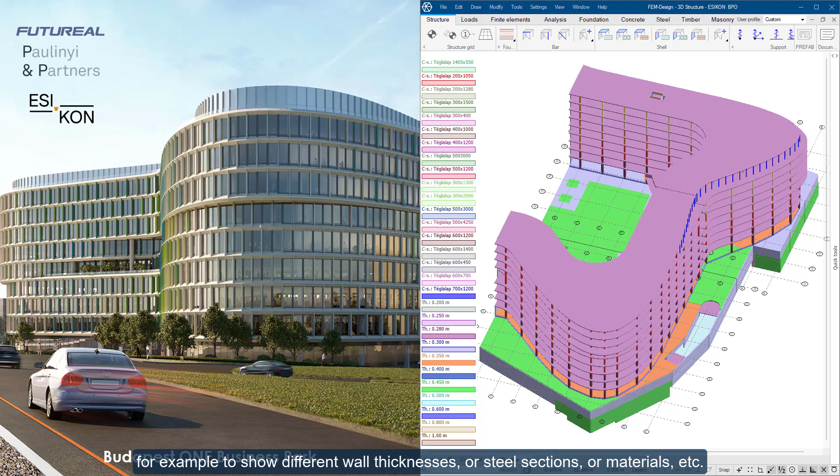Elements can be exported with the current display colors. This is useful if we use color schemes in FEM-Design, for example, to show different wall thicknesses or steel sections or materials and so on. The Revit user can then immediately see the same visual difference.

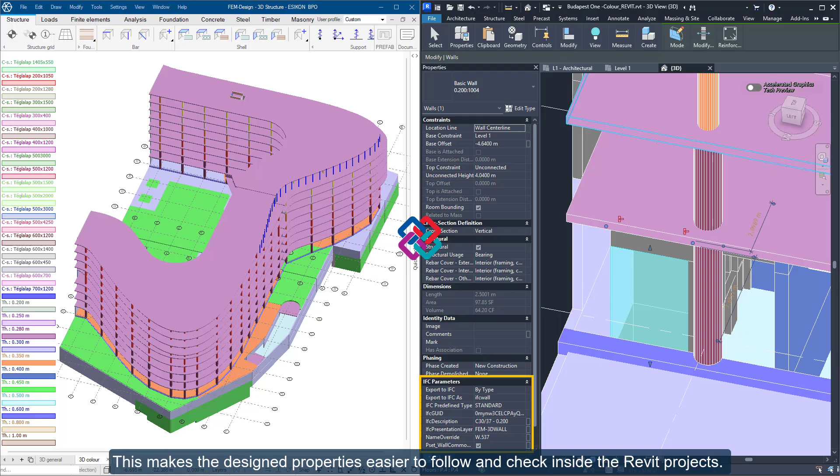Objects with complex geometry may arrive in Revit as in-place elements. These are usually edited with the family editor. Simpler objects can be edited directly in place. For example, in Revit, we can modify the height, width, and thickness of a wall. The design parameters coming from FEM-Design are also available in Revit. This makes the designed properties easier to follow and check inside the Revit projects, for example, the type mapping, the material mapping, or section mapping.

Reinforcement designed in FEM-Design can also be exported as a 3D model. In Revit, these objects can be used as reference geometry while the design data remains available. This helps the Revit user create detailed reinforcement for shop drawings.

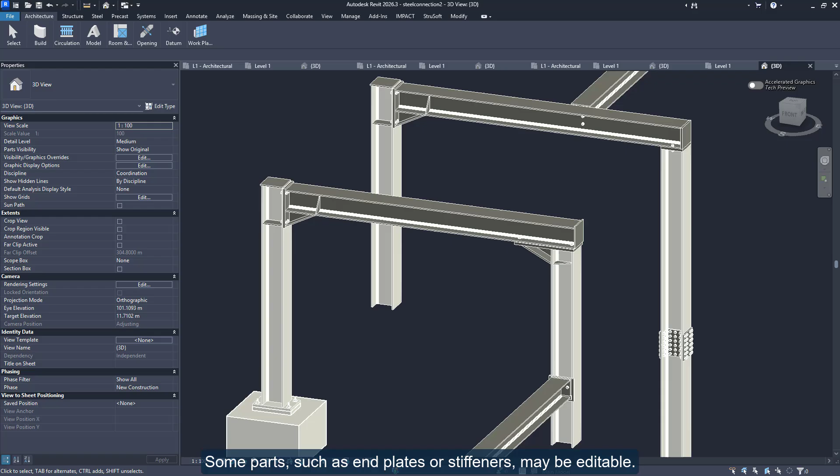The same applies to steel connections. FEM-Design can export design connection objects through IFC. Some parts, such as end plates or stiffeners, may be editable. Others, such as bolts, may be reference objects. But the important design data is still available: type, material, dimensions, spacing, and connection identifiers.

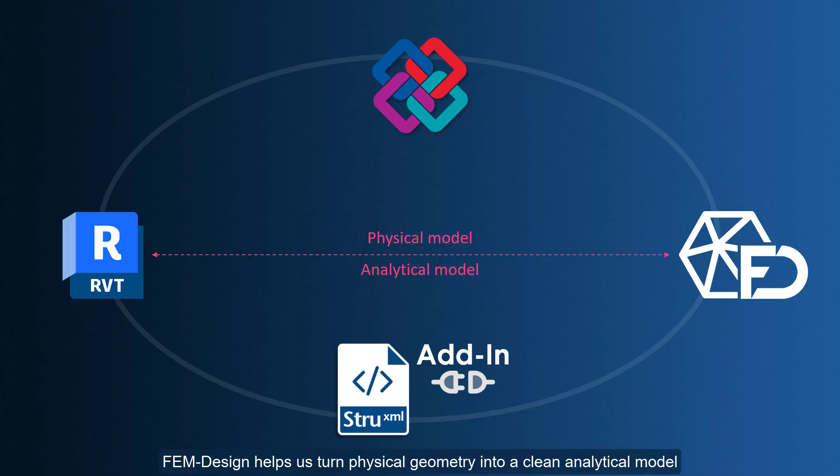To summarize the webinar, the best connection between Revit and FEM-Design depends on the model we receive. If the model is analytical and prepared in Revit, the add-in and StruXML workflow is usually the fastest and most direct option. If the model is a physical, architectural, or structural model, IFC is often the better choice. In that case, FEM-Design helps us turn physical geometry into a clean analytical model with tools for filtering, correction, connection, and checking. So the key message is simple. The better we choose the workflow, the less time we spend fixing the model later.

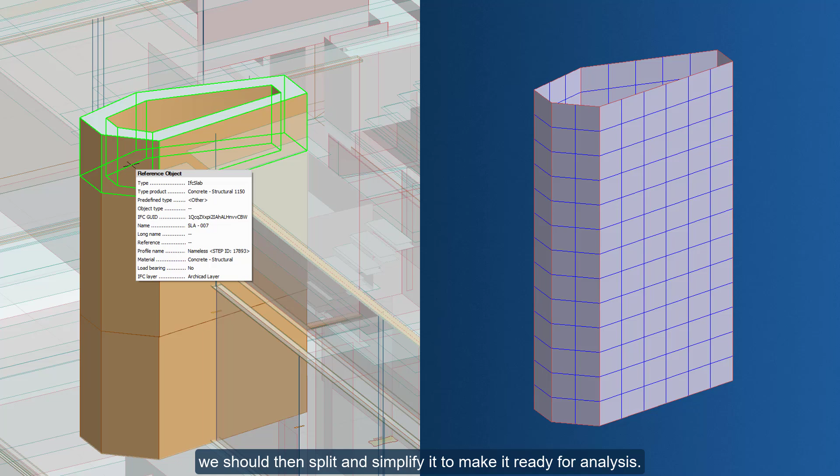Sometimes the object type itself tells us which workflow to use. For example, complex physical geometry should come through IFC, not through the add-in. In FEM-Design, we should then split and simplify it to make it ready for analysis.

It is also useful to agree on the workflow with the other disciplines before the exchange starts. Decide what model will be sent, what should be included, what coordinates to use, what each software can handle, for example, Revit or Tekla or FEM-Design, and who corrects what. This makes the exchange smoother and more predictable.